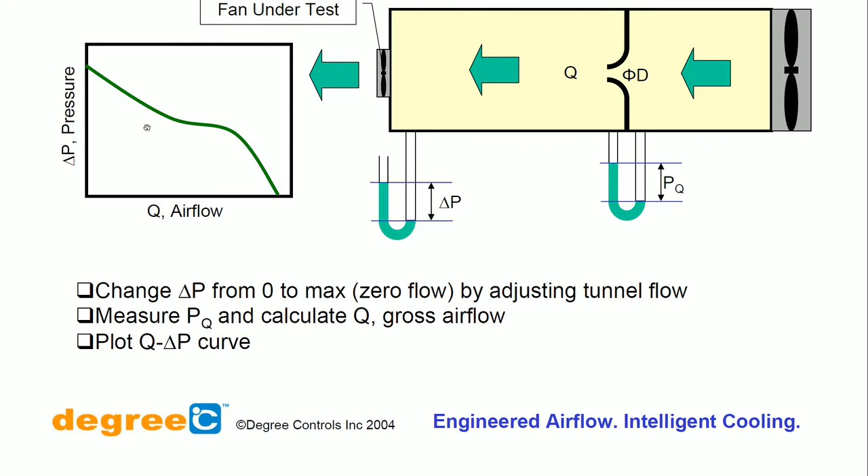Again, as is the norm, this is taken from what I call Engineered Airflow Intelligent Cooling by Degree Controls from 2004. It has been presented very well, and in general it covers what I feel is important for a designer to understand.

So obviously every person has a beautiful brand new machine, but not many people make their own clothes, because designers and merchants are out there to change the designs.

So coming back to my slide again, these people have suggested one very simple way: you must have an authentic pressure versus flow characteristic of a fan. It's not easy to determine that for one particular piece which you have been using. The simplest way of doing it is to make your own setup. It is not an impossible thing.

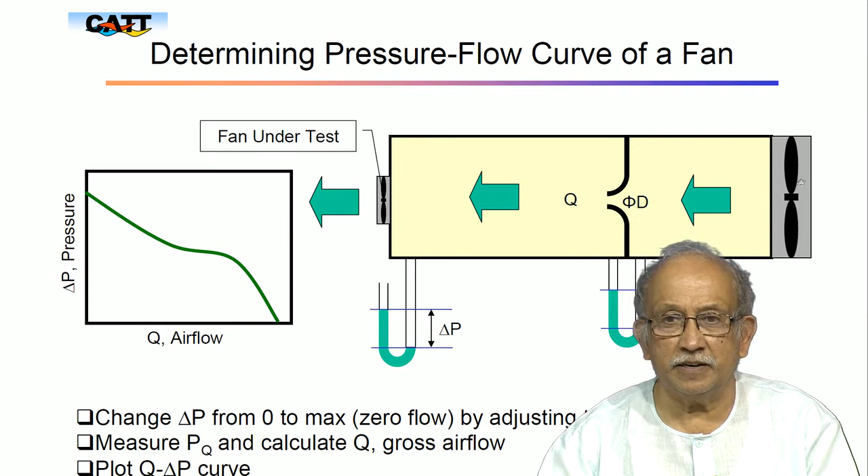The issue here is we need to somehow plot this curve: pressure and change in pressure versus airflow. This is where we end up with real life conditions.

What is the voltage with which you are operating, and related to that is the frequency also. Imagine most small motors are very much dependent on both the voltage with which you operate and also probably the frequency. While for a larger motor it is very easy for us, for a smaller motor, especially if it is AC, you need close control. If it is DC...

To some extent, somebody has done this experiment for you, and being a DC motor, life is relatively easy, because with a DC motor you have only one simple parameter - increase the voltage, and it works well without any problem.

In the case of AC, you need to characterize this, and this is where things get complicated. A small change sometimes makes the curve significantly different, and it may or may not follow like this. For all we know, sometimes it may cross and come over here. A small change, similarly a slightly lower voltage, may lead to other effects, and there is also self-heating.

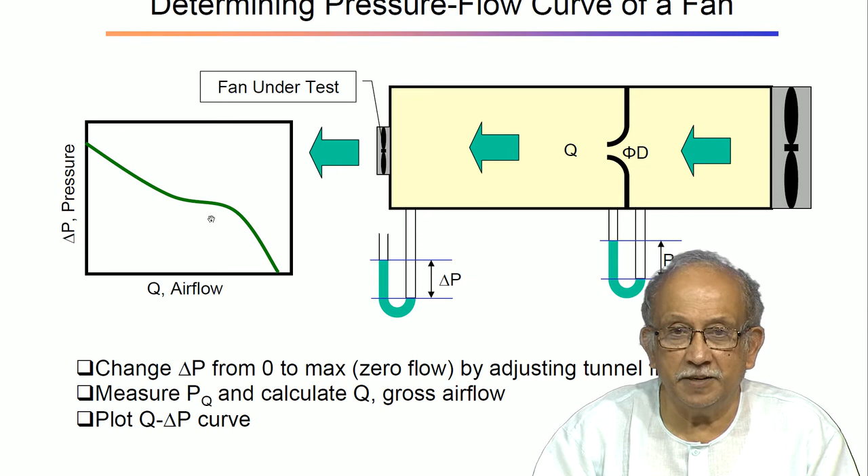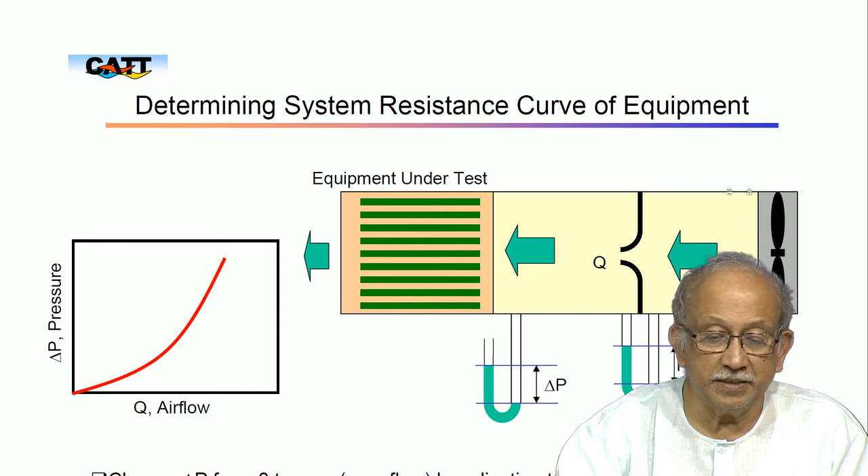When you run a fan, two things happen: one to the motor itself, and one to the air all around. So if you have an authentic curve using this plenum chamber setup, it is very much possible for you to plot these things.

Similarly, the much more important or difficult thing for you to plot is the equipment system resistance, which, even if you have measured it, is a little dicey, because very rarely can the final equipment be directly used here. You still have a scaled down model, and whenever you have a scaled down model, these principles of dynamic similarity apply. So only to a certain extent can you make a scaled down version or even a full scale mock-up.

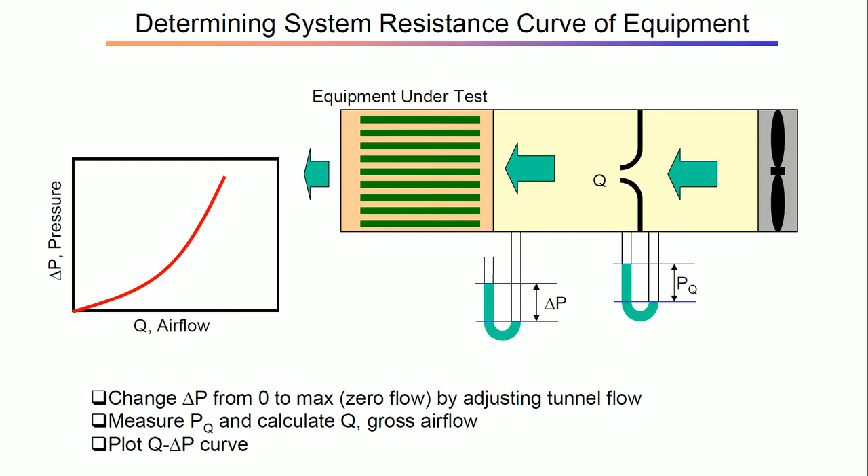So if you do the same thing - find out the change in pressure from 0 to maximum by adjusting the tunnel flow, measure P Q, calculate Q, and plot Q versus delta P curve - it looks easy. After that you superimpose one over the other and expect everything to work exactly, but no, miraculously, everything does not just work. There are not many miracles that happen - you have to make your own miracles.

So we see here, obviously, this is a beautiful, nice and properly laid out piece of equipment.

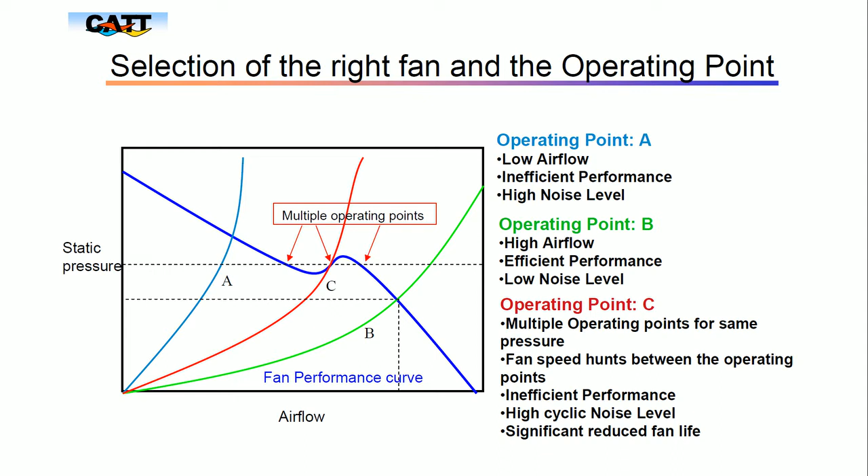In a properly laid out equipment, you have ensured that the static pressure for a given airflow is very low. Improperly laid out equipment ends up with problems, and this may be due to bad luck because Murphy is at work. Murphy is not at work only when you lose a nut or when you are otherwise careful. Murphy ensures that we end up with these funny things.

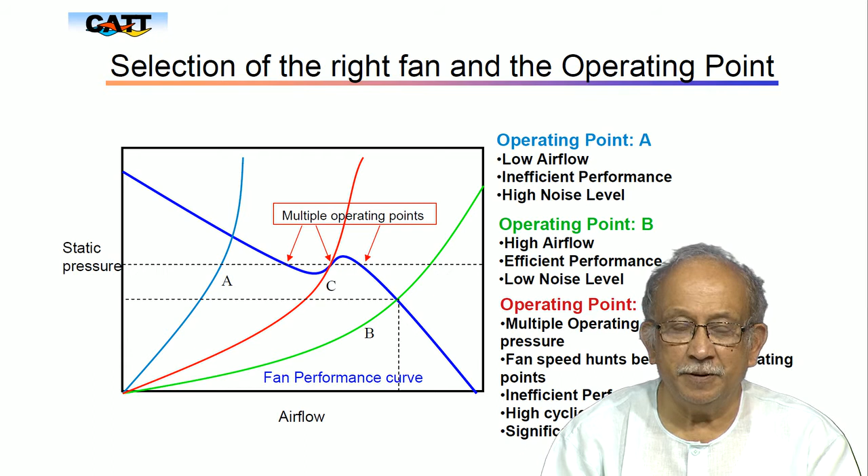And anything you do to improve any other heat transfer seems to interfere with these things. If you put more fins, what was perfectly fine has now moved to that side. And then if you try to add baffles to ensure that your air is properly channeled over your hot surfaces, you may even end up in a situation where you do not know where you stand.

Then what did they do? They had to mill the heat sink in a particular way so that the air can go away properly. Now, all these things, there is no simple way of modeling and calculating.

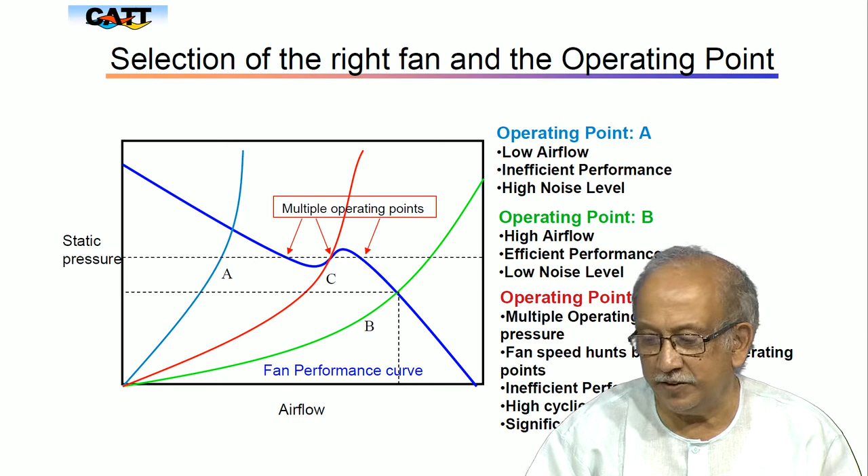We have this issue of smart design. It is not about a new type of smart design, but what we are talking about is being smart in design and eventually trying to put proper sensors and all.

Can we simply increase airflow as power increases? It is obvious, it is sort of a rhetorical question saying yes or no, and cost we also know, no, sadly cost is very much around.

And next, though he says a quick summary, it is not as quick a summary as it sounds. You have seen here.

Type of fan: tube axial, vane axial, blower; operating point on the fan curve; size of fan diameter; speed of rotation; density of the gas or air. Most of the time luckily we use normal ambient air, but once in a while you may be forced to dry the air, or you may be using a chiller in front of it, which marginally changes things.

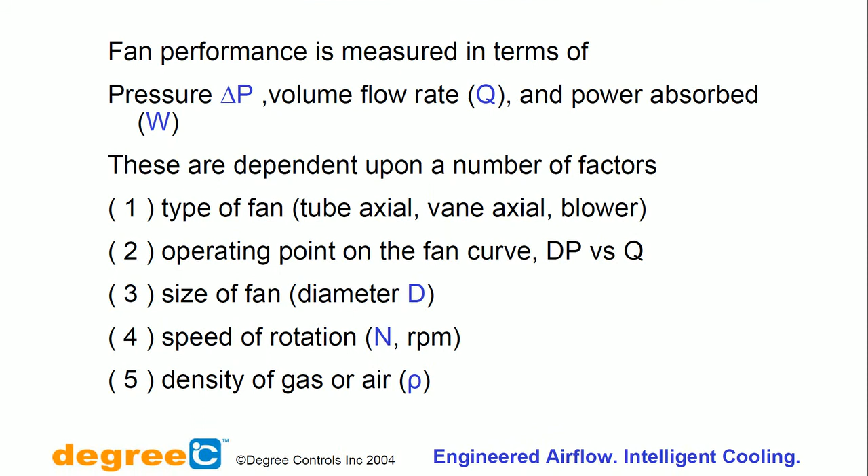So we have the speed of rotation - faster obviously gives better flow rate - and then right now we have the issue of efficiency of the whole system. As we are working for more and more of the change in going green, we need to consider efficiency. It is not just about peak power or peak torque or peak flow or anything like this.

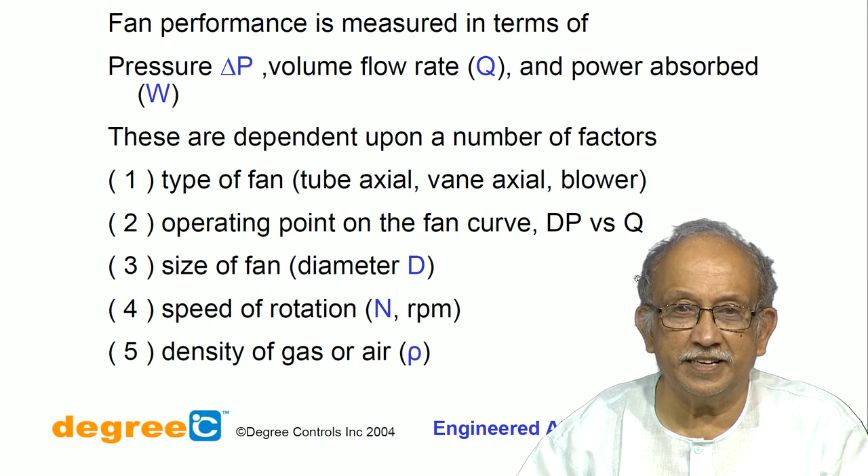So they have given so many things here. I think those are all. Considering a point of operation on a fan curve, it is possible to derive some simple scaling laws between change in pressure, the total wattage, then the speed and the diameter of the fan, and so on.

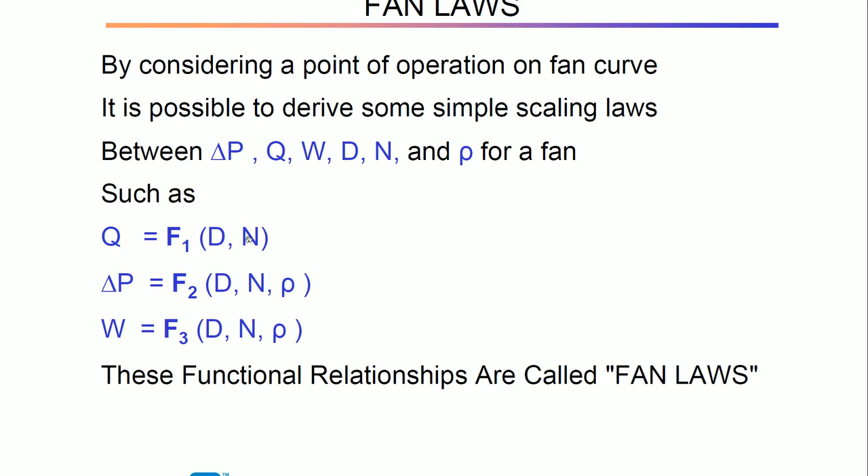And rho for a fan, you can read here, is a function of this and this, saying diameter is large and the speed is more. Delta P is again a function of these things, and he has shown that...

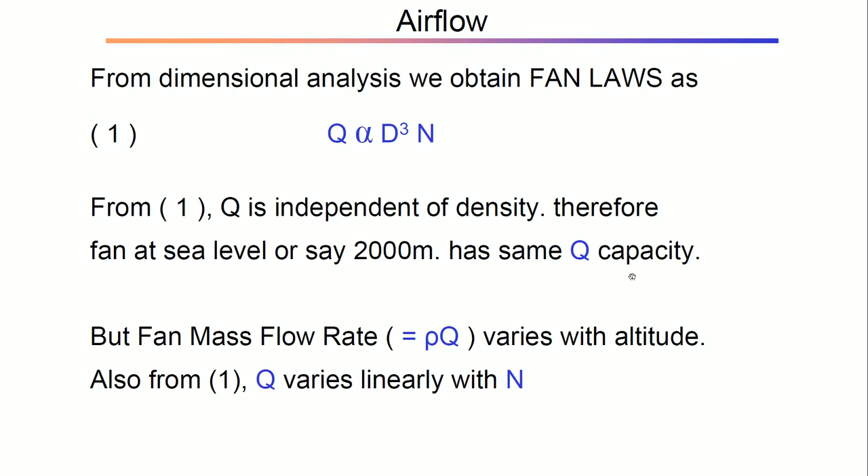Q is independent of density. Therefore, a fan at sea level and at 2000 meters has the same Q capacity. Fan mass flow rate varies with altitude. Q varies linearly with N.

So there is something about the differential pressure, then there is a pumping power required, and then the total - if you ignore electrical efficiencies, suddenly something else has come into picture. Fan motor itself has a resistance, which slightly depends once again on the speed of operation, back pressure, and so on.

So we have this pressure and power characteristics, and some nuisance which is getting real. Actually, if you are stuck in a room where a lot of this equipment operates, we end up with sound, too much of sound.

So, it is real - you have no way of getting over it. Just sticking a fan in the airflow path, compared to what I've told you, and making it face a load - if there's a hot component, you make it face that - does not seem to cure all problems. One problem it solves: it makes the peak temperature less.

Actually, the fan has no that much direct control on peak junction temperature, as much as cooling the fins of the heat sink. Once the fins of the heat sinks are cooled, a lot depends on fin efficiency. At very high velocities, if you take a standard normal extrusion, fin effectiveness comes down. Beyond a certain point, that's where Schoenhauser mentioned, do not exceed 6 meters per second - beyond that it does not seem to make any difference, except it's already neatly packaged. And noise is dependent on speed.

Okay, next is engineering implications, or the 4 fan laws for sound, then the total amount of discharge, total amount of power dissipation, and then total amount of static pressure.

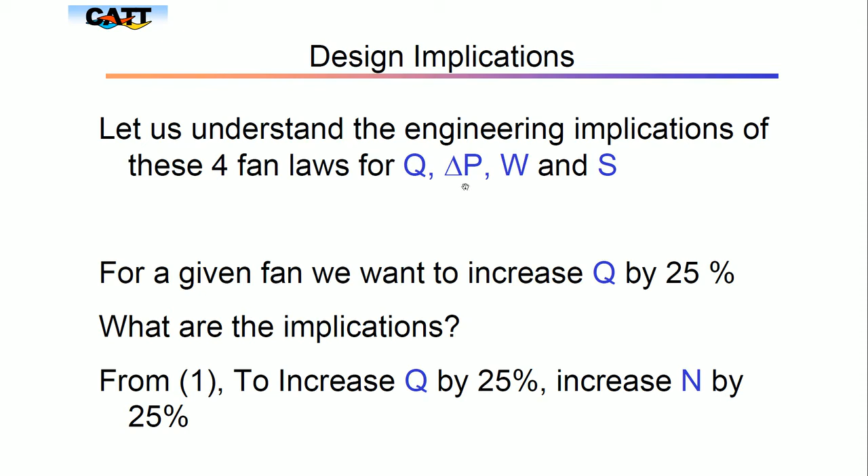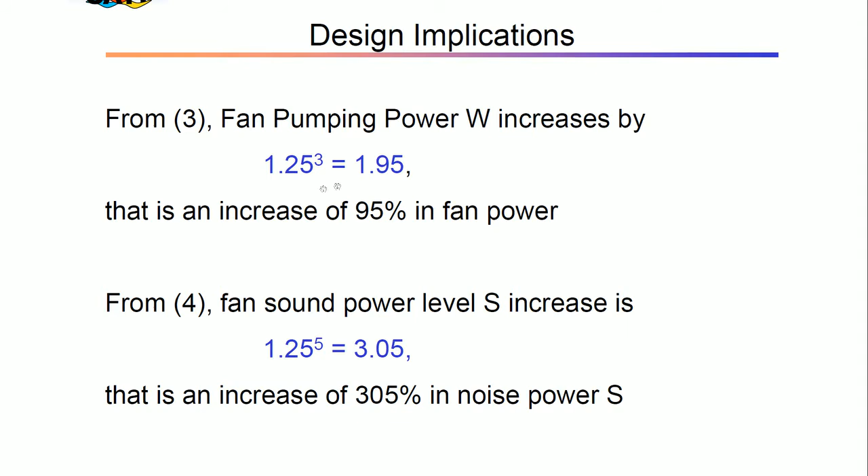We want to increase the discharge by 25%. To increase it, we increase N by 25%. You see here, pumping power seems to go up by 3 times. Fan pumping power now suddenly has become doubled. What was 1.25 has become such a horrible thing - 95%. Sound power level increases 3 times. So now comes the trade off - what do you do?

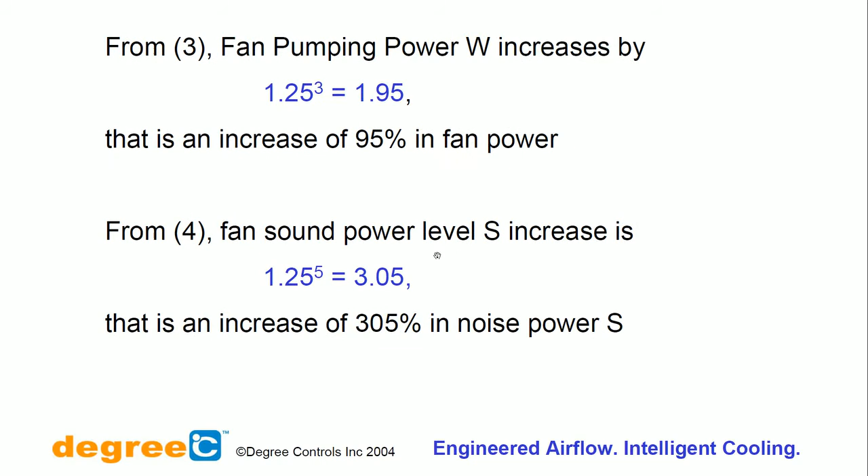So, from the sound law, it can be expressed in decibel form as change in sound power level. So a huge difference is there, though he says 5 dB difference in sound level is noticeable. Acoustics talk about a 3 dB thing - 3 dB is sufficient for most people to feel uncomfortable. From this, a perceptible difference is 3 dB, especially in silence.

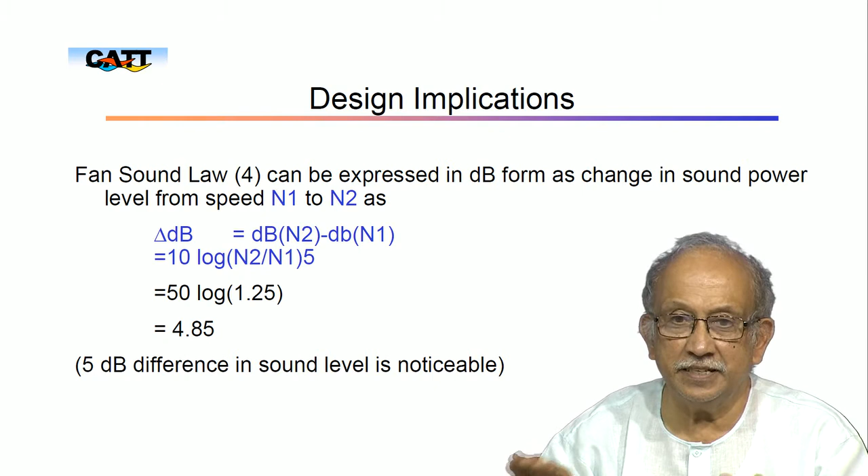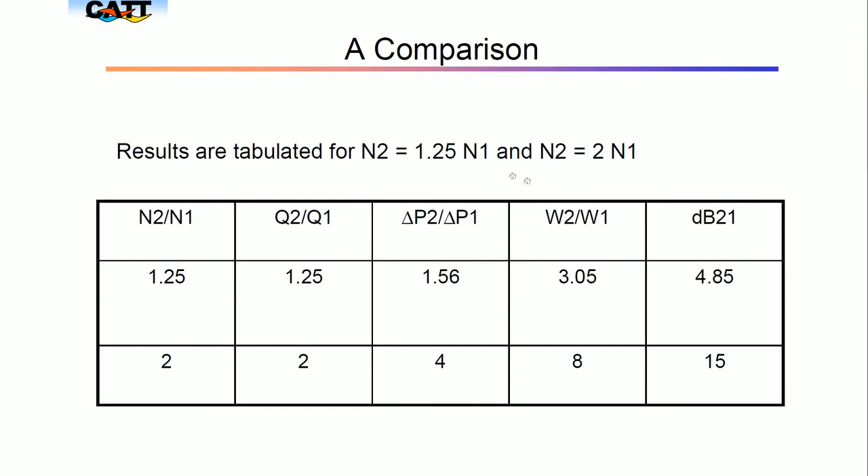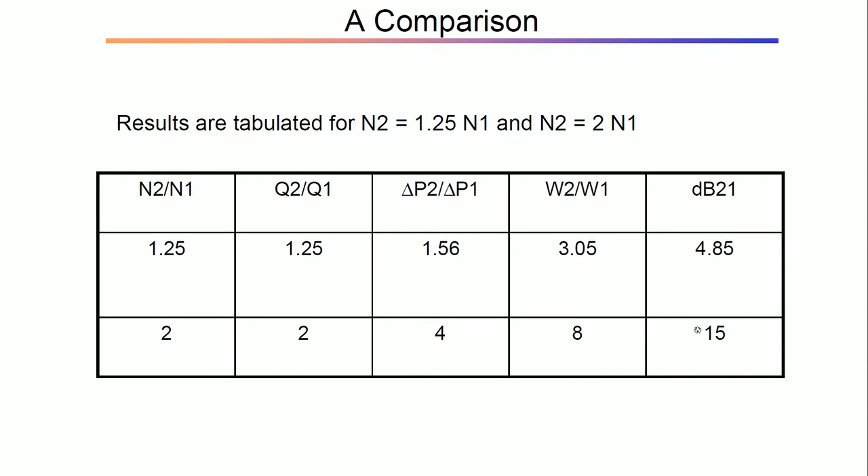So, this is probably the sum up of all the things related to fans. Doubling the speed increases heat transfer coefficient by only 62%. To remove more heat, airflow should be doubled. Doubling airflow causes delta P to increase by a factor of 4. Power required to double airflow is 8 times. Sound level increases by 15 dB - that's a lot.

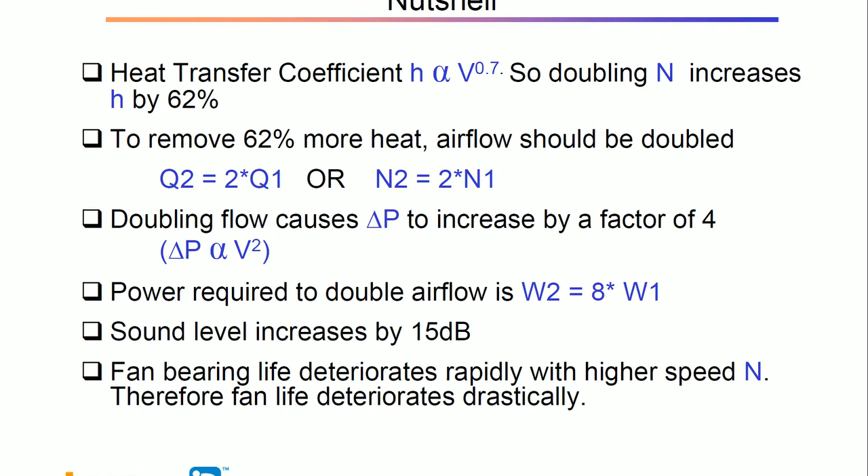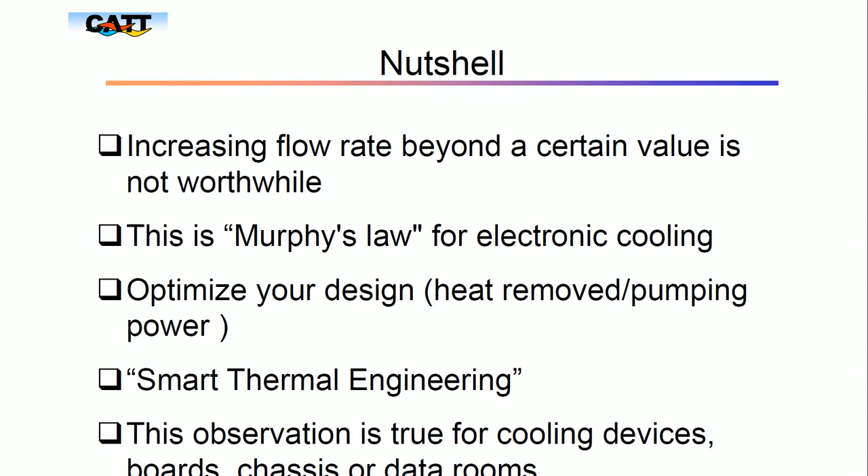And something which we forget - the fan itself deteriorates drastically. So, it's not just enough to add a fan; we have a problem, you can just marginally increase the speed also, it's not constant. This is where people with that experience have said - increasing flow rate beyond a certain value is not worthwhile.

Murphy's law for electronic cooling: optimize your design for heat removed versus pumping power - smart thermal engineering is true for devices, boards, chassis, or data rooms. For cooling devices, you would have noticed long ago - the chips themselves, we have a little problem with the chips.

Next comes - how do you cool things? Is it just about simply increasing conduction, or do we now talk about phase change, or do you talk about Peltier mechanisms?

Things like heat pipes seem to go in and out of fashion - they come into fashion, they go out of fashion, they come back in. As of now, you can't beat simple conductive heat transfer from the chip and a little bit of better geometry on the chip, including mounting it upside down.

Next time a cell tower is being opened and checked, I suggest having a look. If possible, I will try to have a look at it too.

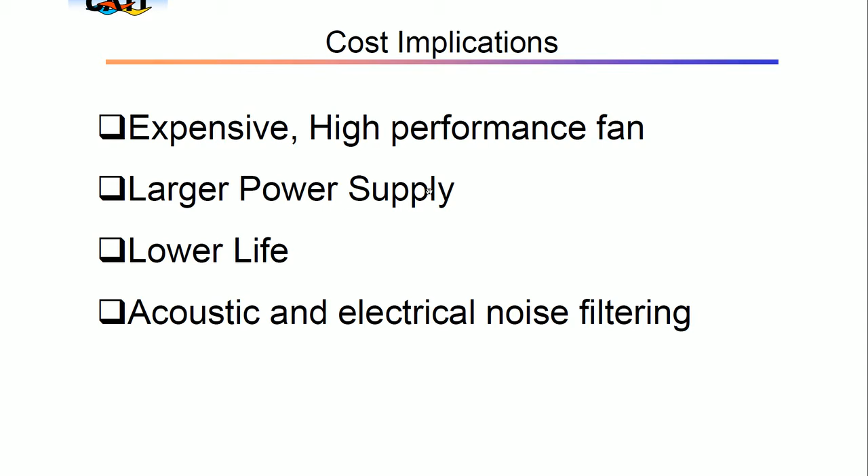The earlier approach is just to make a better fan, but are we ready for a better fan? The military can afford it, and others can afford it too, but the moment you do that, we end up with larger power supplies, and overall we put up with lower life, and we have this big nuisance of electrical and acoustic noise filtering. It is real.

It is just real. Beyond that, at this point I can't comment on that.

I will just show you, this to me is a wonder. I have this small beautiful hearing aid, it costs a lot of money. Sir, can you focus the camera on this, zoom in if possible. You have seen this, this small device has everything I can talk about.

And you see this, I am sure all of you have this, this nice fashionable watch. This is the tracker, it tracks my health and my whereabouts. Other people have a stake in me, other stakeholders in my good health besides the insurance company, so obviously a lot of people need to know about it.

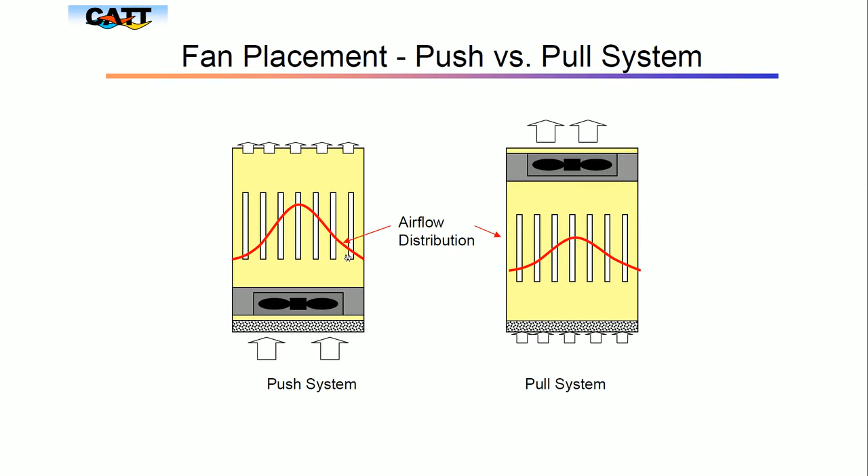So it is possible for us to decide which way to mount these things, and in this case it looks almost like a laminar flow in a pipe, which is not strictly true, they are just showing it that way. So you can decide where to put what in these systems.

You have seen this here, very important, I had mentioned it to you in passing: pressurized system, clean air, low fan operating temperatures. In the push design, the main thing is you direct air directly, and the fan itself sees ambient air which may be cooler than the exhaust air, and very importantly the whole system is under positive pressure.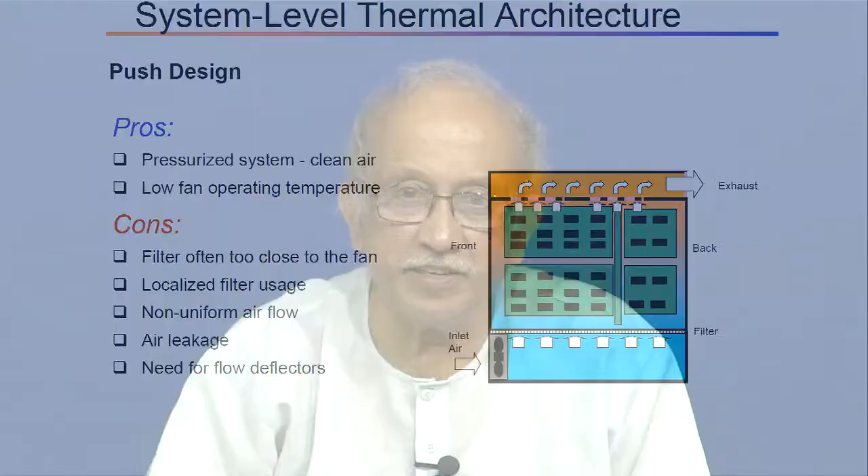This is the same thing that happens in most clean rooms, they adopt that system, the whole chamber is positive. So to the extent that when you open the door, or even through small gaps everywhere, air blows out of the gaps, and any air pressurizing inside is filtered neatly and kept pressurized, so unwanted dust and outside contaminants do not get tracked into the space. I hope you appreciate the point.

Whenever you push air in, with the inlet air pressure coming here, the whole thing is under positive pressure. The color again depicts cold versus hot visualization, and you see here everything is cool. You have a filter which gives you slightly better control over it, but the con is that airflow is not uniform.

If you have so many racks, so many PCBs, and you have a fan here and a fan here, we do not know where the air is flowing. You have really no strict control over it.

Localized filter: if you have a square filter and put a small fan in it, the air does not get enough gap for development of the flow. So you will get a nice patch of flow, but the remaining area will still not be useful, and then you have an air leakage issue here.

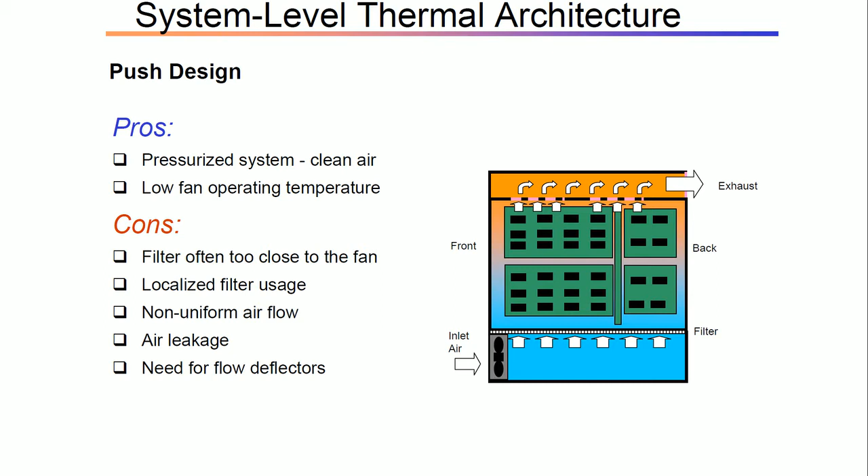While it looks nice, the smallest gap - let's say you have a connector, a switch, or access somewhere - any small leakage will allow the air to escape. So we have a problem there, and he calls it a flow deflector. You end up trying to use aerodynamics, CFD, and those things to push air properly. If you don't use that analytics, you will end up with trial and error, fit and see, blow and see what happens. So while it is complicated, professionals are there who do it all the time.

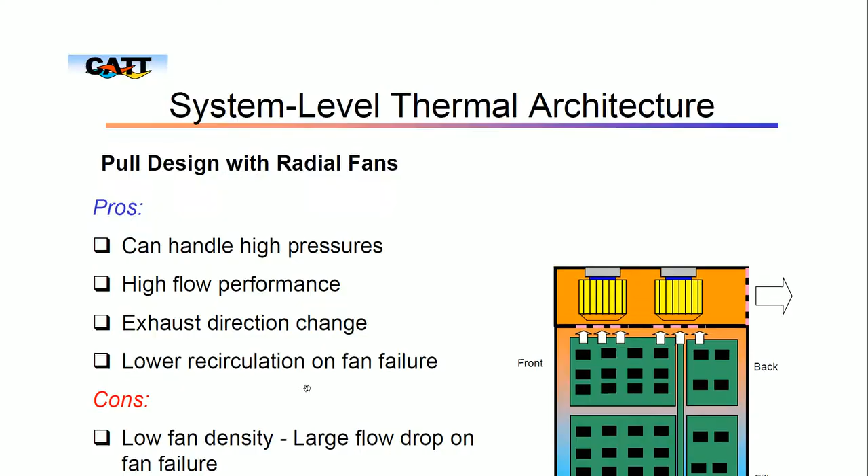Now we come to an equally interesting thing: can we have radial fans with a pull configuration? If you remember, I showed you the two circular fans in the center - there's an inlet, and exhaust is all around. It's a simple radial fan which goes in all directions, sucking in air, and then throws it out in all directions.

Now, if those fans have an involute housing, it becomes like a regular blower - a little like the blowers you may see at home in your kitchen hood. If you have a hob and a hood above it, there are very simple ones with only one or two fans stuck on. There are very complicated ones which have these extractors with special involute casing blowers attached. The advantage inherently of these is it can handle higher pressure for given parameters, but they also take a lot more power, have high flow, and allow exhaust direction change.

So it is possible for us to play around with which way it goes. That's what I was telling you about lower recirculation on fan failure. In the unlikely case of fan failure - meaning not a dead fan, it will start running slow - inside, the chances of things getting recirculated are poor.

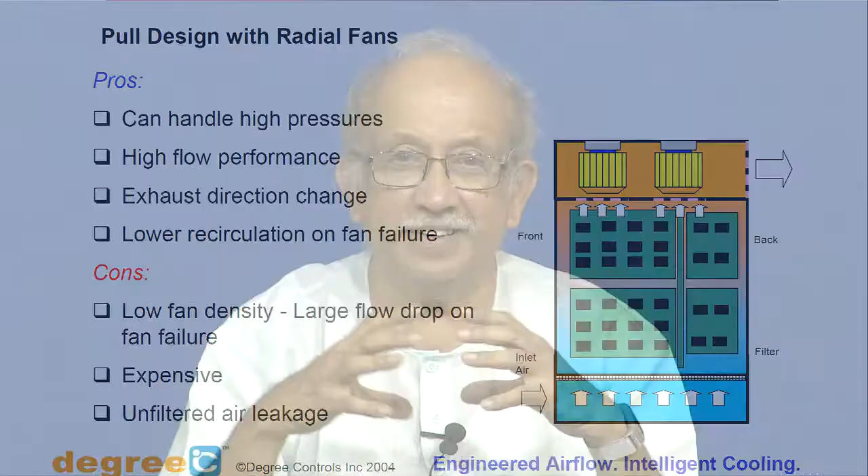Low fan density, large flow drop on fan failure means expensive, unfiltered air leakage. You see, the whole plenum - that whole cabinet is like a plenum chamber - is at a lower air pressure than outside. So the first thing that happens is it acts like a vacuum.

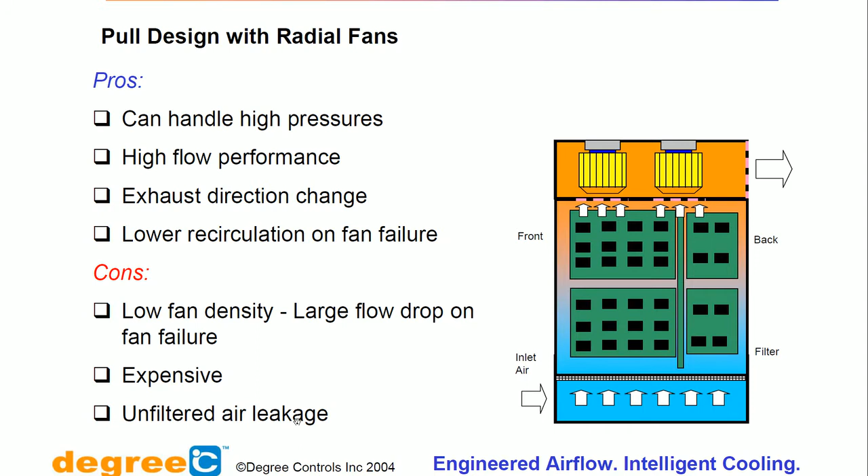Anywhere there is a small gap - let's say you have a potentiometer for adjusting something which invariably comes with a cap that has to be closed, or you have a connector which already has a cap. Not all connectors are fully IP67 sealed and all that. So anywhere these gaps exist, air keeps going inside. And power is reality - you have power cables, and various places where cables have to be inserted, not quite a full bus bar. All these places will suck air. So the problem isn't just about air leakage, it's about unfiltered air getting inside.

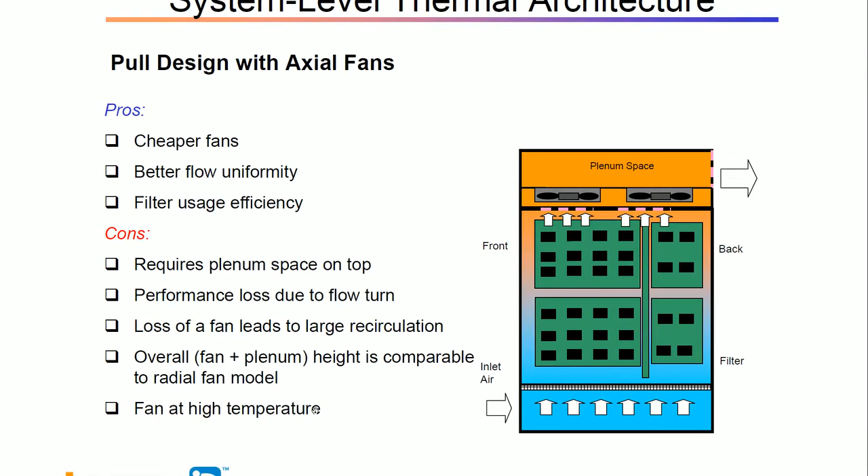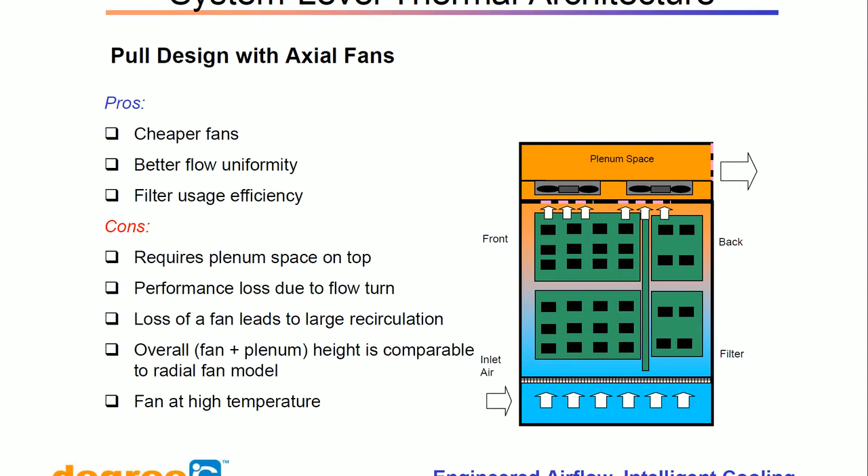So while that was shown with radial fans, now with axial fans it seems to be very easy to manage. All you have to do is take the fan which was originally at the bottom, remove it, and put it on top instead, with a space here, and you can buy these fans off the shelf.

I expect the ones we get now are the 100, 120, 110 fans - about the size of a CD. So they don't cost too much. In Indian rupees, a good metal frame fan probably costs about 500 to 600 rupees, and works directly on AC - so maybe 10 US dollars.

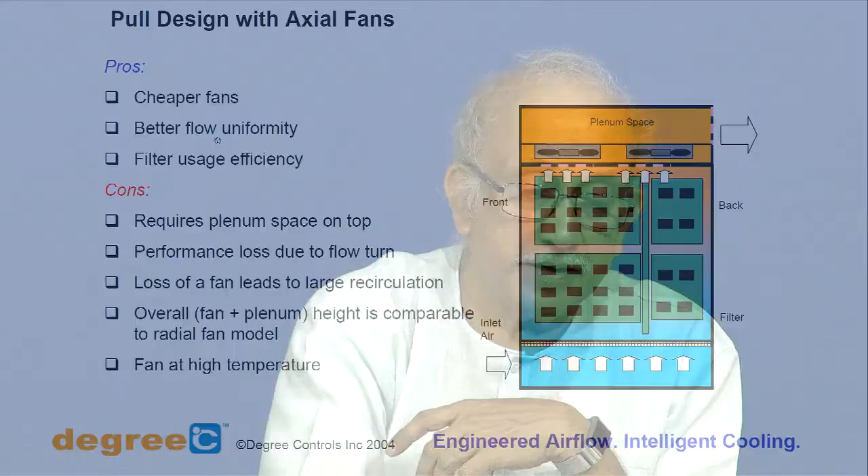So you can stick as many as you like all around. This gives better flow uniformity, the flow can be controlled, and most important is filter usage efficiency - because while here the pressure drop can happen, as it comes down, all parts of the filter can be directly used, which is good, isn't it?

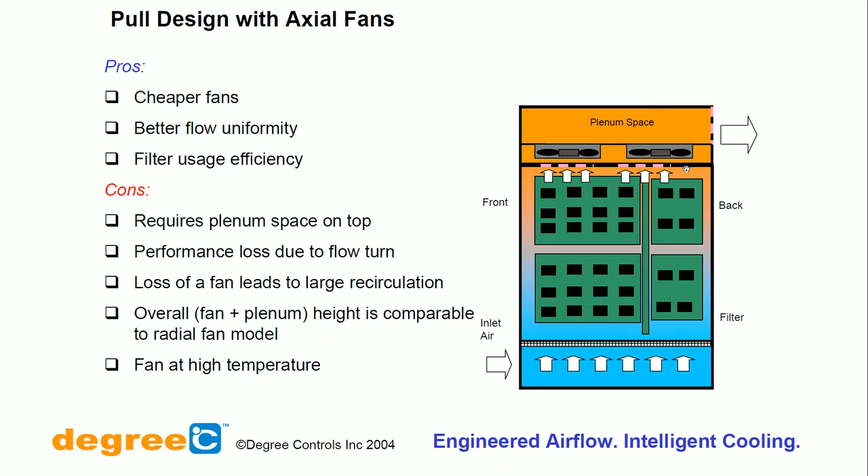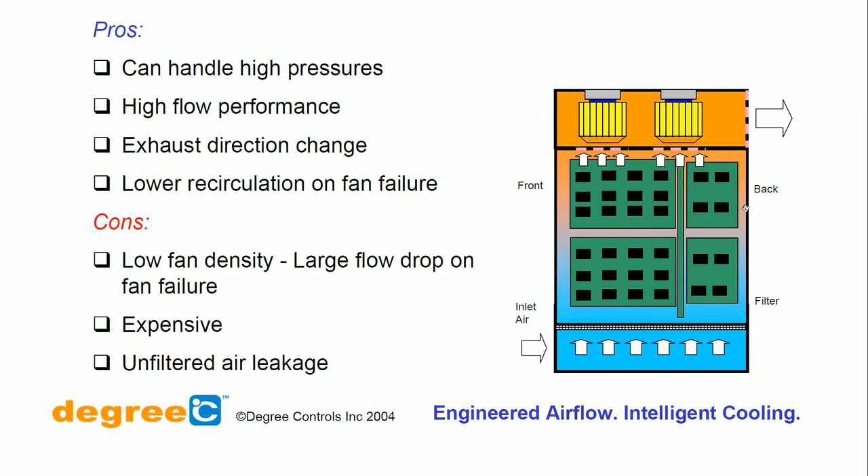Now, the problem here is there's a space required on top. In the previous picture, not much space was required. If you remember - here it's only limited by the total gap of the fan that's available. Only for convenience, and not to scale, he has shown all of them now about the same size.

Other than the fan itself, no extra place is required for us, and whenever there is an attempt for the flow to turn, you have a small problem here. This area is already at a slightly positive pressure compared to that area. So however you arrange this fan and this space, there is always a compromise.

Loss due to flow turn, loss of a fan, leads to large recirculation. I am not very clear at this point, but what I expect is, in case one of these fans fails, the air does not behave the way we want it to. Fan plus plenum height is comparable to the radial fan model, which is what he has shown. Fan sees the high temperatures, you see here this red, already the hot temperatures are all seen by the fan.

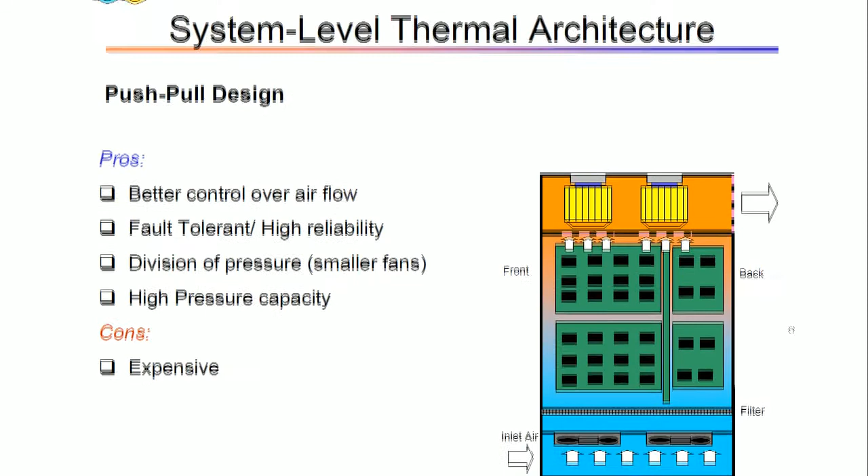So the next slide talks about, can we have a compromise? Can we have a push-pull design, saying you have something pushing here and something there? Like all other design considerations, it is still a hodgepodge and a compromise.

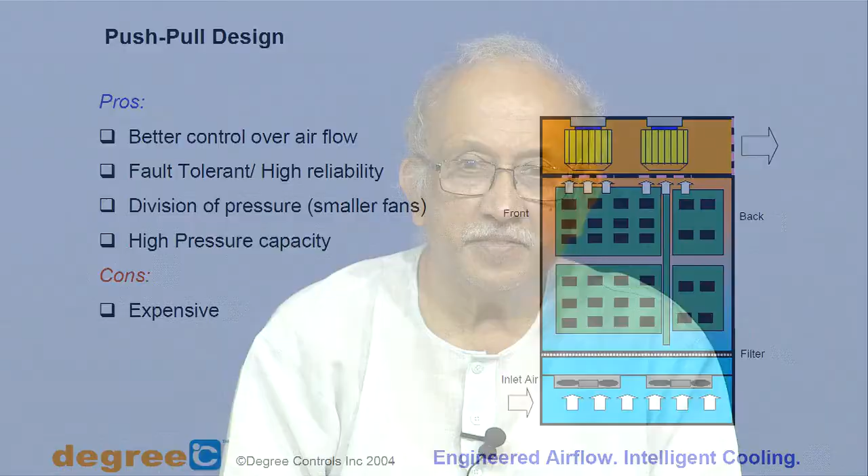So airflow you have some control over, slightly higher reliability, though I would like to contest that, because the more devices you have, the chance of failure is a little higher. But in the case of a fault, there are still parallel things operating, which happens with nature.

You must have heard of something called collateral circulation, which happens when people have a heart problem. Suddenly they discover they have been living with it for, let us say, 50 years. They say you had this at a young age, and nature has compensated and given you alternate circulation, hence you never noticed it. Now when you come, you have this.

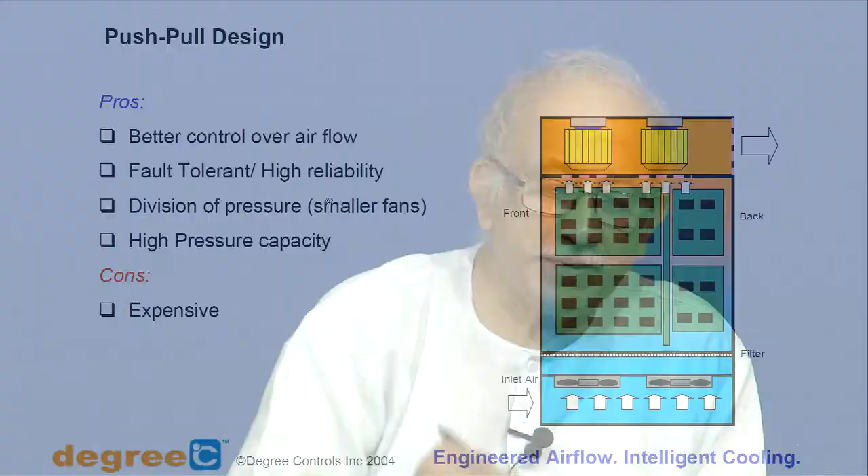So coming back here, the pressures between this and this can be improved. Fault tolerance is about that, and then high pressure capacity, because we have full control on it. On one side you are blowing and on one side you are exhausting, but the main thing is it is extremely expensive, and contrary to what we think, it is not as easy to control as we think.

Where do you put the sensors, where do you put the vane switches, and how do you take care of temperatures, and which one do you switch on and which one do you switch off, is not known that well.

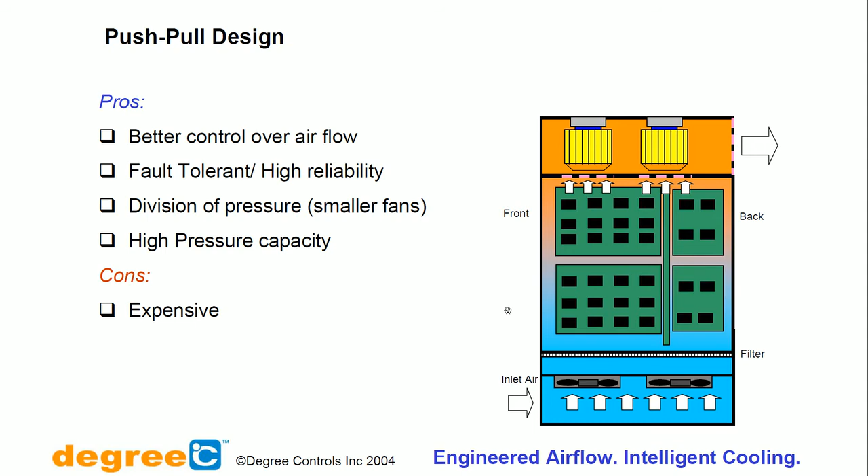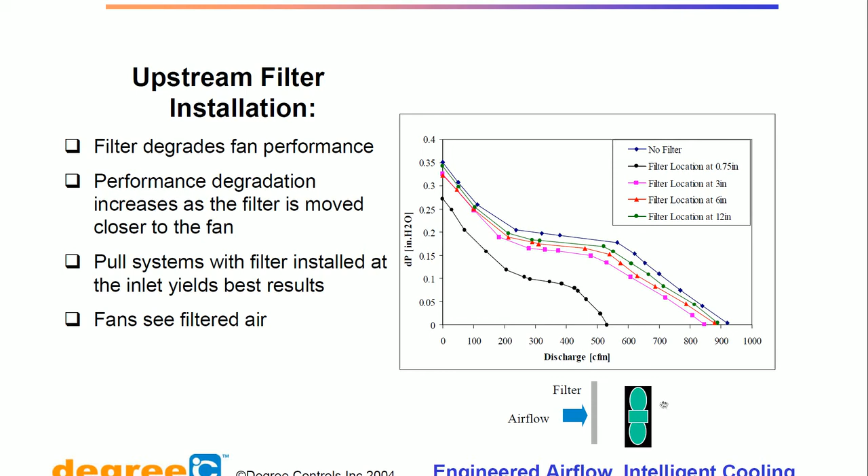If you put a little more gap and move it back here, it is better. Pull systems with filter installed at the inlet yield the best results. Fans see only filtered air, which is a beauty compared to the other one. Just like you have this thermal heat issue, if you were to keep the filter here, the fan is relatively cooler. So when the fan is rotating, all the dust gets settled here, so maintenance is a little less.

So we have that the same thing is maintained here. Filter degrades fan performance, location does not affect fan performance, cannot be used for pull system, fan sees unfiltered air. So you have the advantage and disadvantage. This you probably would have noticed, in case you have an exhaust fan in the kitchen, it always gets coated with grease. I think you have taken all possible precautions, but grease is real. The same fan, when used in your restrooms and toilets, you do not have the grease problem as much as you have other problems. So the specifications are significantly different.

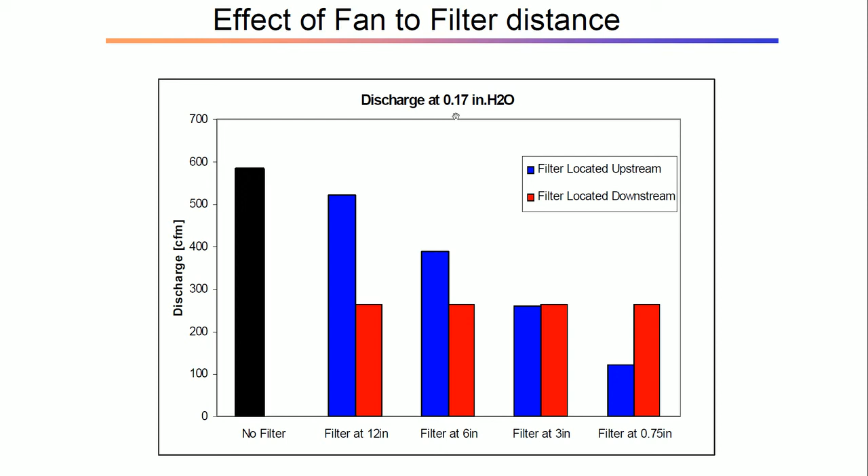So these have all been plotted, showing filter located downstream, upstream, the gap, and no filter, and how discharge changes with so many inches. I am sorry, he calls it 0.17, I am not familiar with it. I expect it is about 5 millimeters of water.

Now we come to the very first, fast evolving things. So we have nice computers.

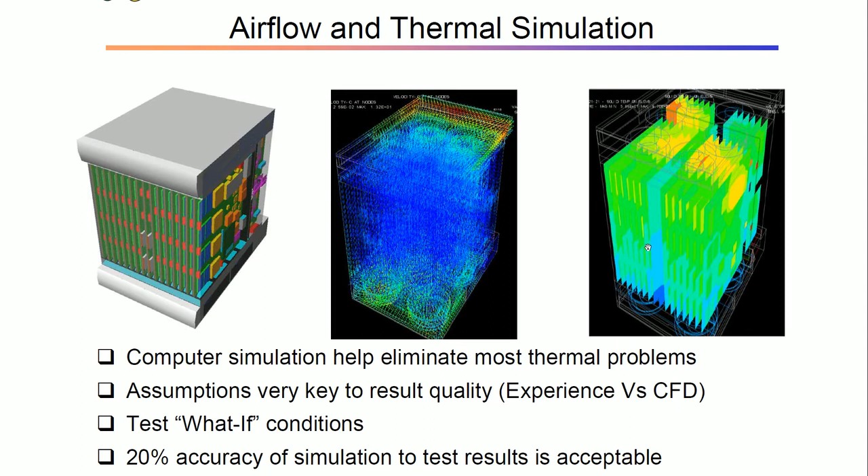He has made, I feel, an off the cuff statement saying computer simulation helps eliminate most thermal problems. I do not agree with it. At least it knows where the problem is, and then the next stage of optimization of positioning does solve the problem. So airflow and thermal assumptions are very key to result quality. So, garbage in, garbage out. Unless you know the actual heat transfer coefficients, actual performance, everything, and the main thing is this: what-if conditions. If I put more spacing, how does it happen, what to do, and all that. So I think they have shown something which is simulated.

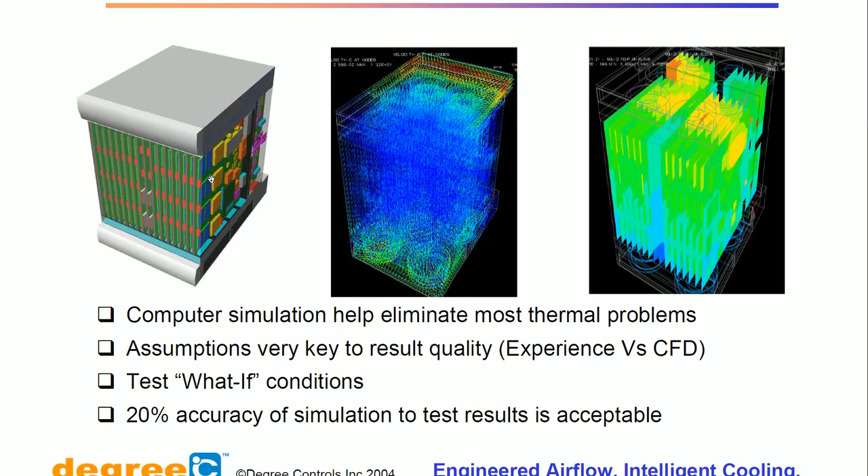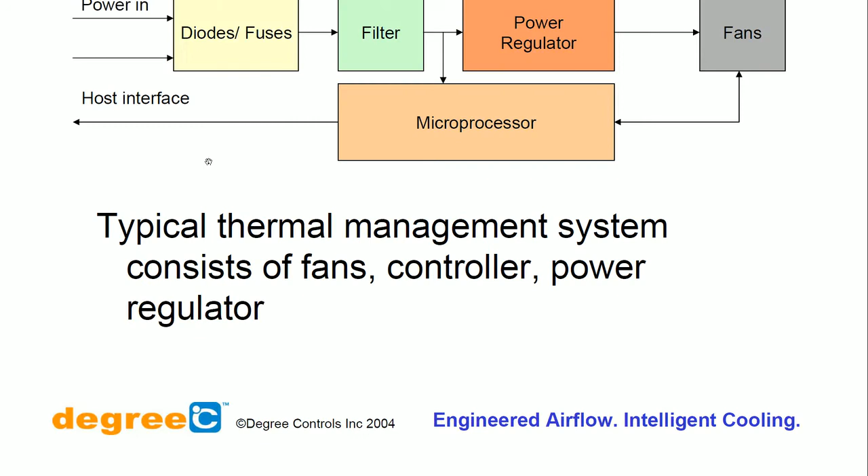Why I feel emboldened to show this is, we have done a similar thing in the case of one of the early telephone exchange racks in India. So maybe it is a lot of control of a cooling management system. You have diodes and fuses, and then you have filters, a regulator, a microprocessor.

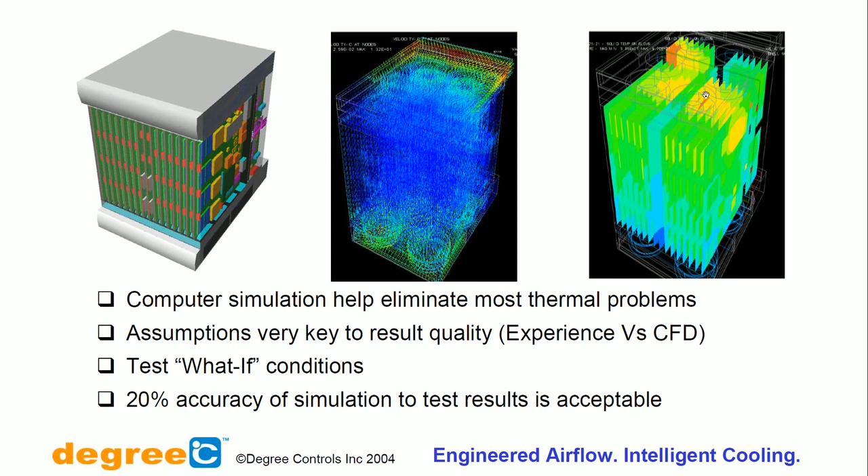Coming back, you see here we have a computer simulation which, I will repeat again, does not really solve problems, but it can test what-if conditions, saying if we do this, what will happen. So in this case you see here they have put 1, 2, 3 some devices which will form the configuration, and we come here slowly.

Various types of things, saying the thermal management system consists of a power regulator and the actual fans, then you have filters, and these are all some backup things, saying in case of something, what will happen. Especially to prevent that, they have given a diode logic here. So you can in fact have two dual power supplies.

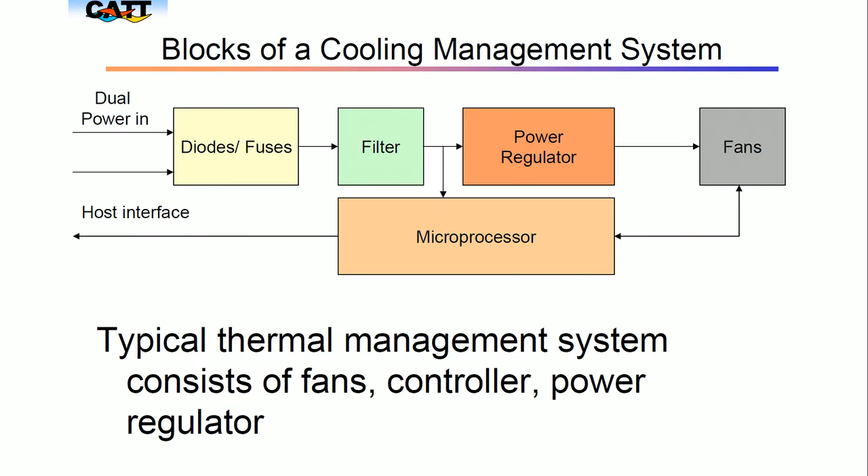So one of them will come, then this microprocessor is attached to the host interface, where it will take its input from various sensors which are mounted. So the next picture talks about...

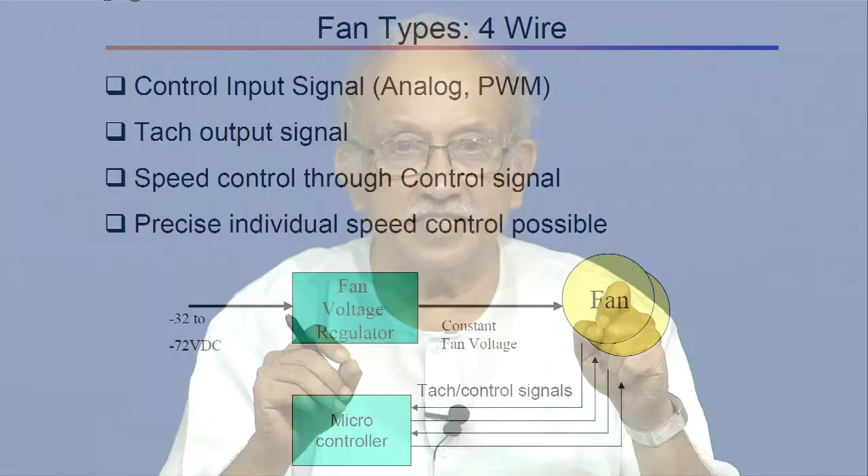3 wire, the succeeding pictures explain: control input signal, analog and pulse width, tachometer output, speed control through control signal, precise individual speed control is possible. So what is done here is, each fan has control signals, and individual fan voltages are measured here. Instead of the fan having only 2 terminals, each fan now is capable of having 4 wires. It is used normally in electronics whenever you want to take a measurement of even a resistor, to prevent the leads from affecting that, you have leads directly at that point. So instead of taking something here, you need to take for everything, you end up with 2 leads. So if you have a full 4 wire system like this, you have much better control.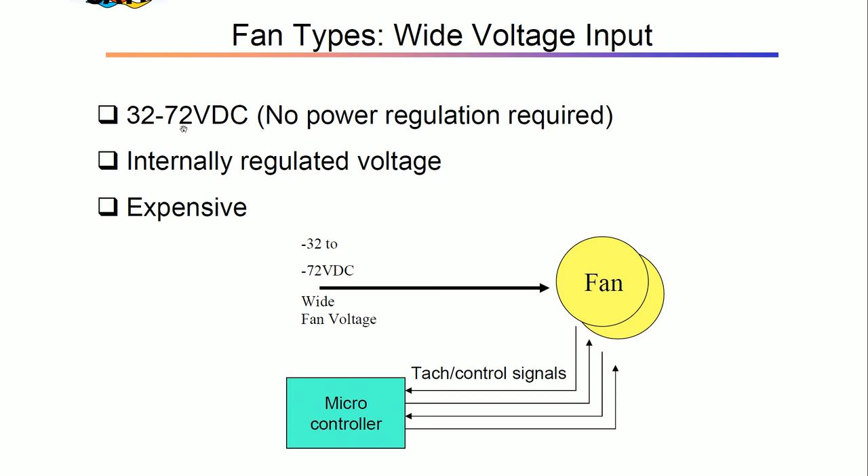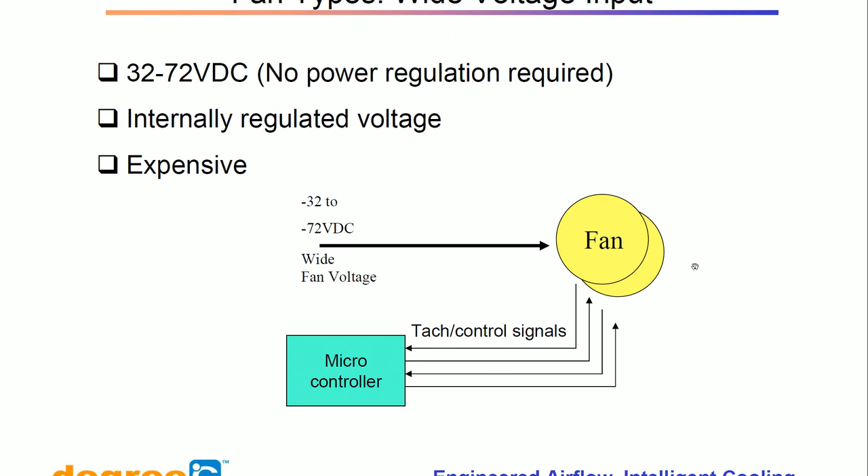No power regulation is required if voltages are available here, internally regulated. Only problem is it's expensive, somebody has to work on it. I feel it is more taken as a challenge by this company.

Yes, the input range can vary, fault tolerant, and something very important is hot plug-in, meaning when the equipment is running you should be able to add or remove fans. It is a little tough. If you have some redundancy, at least things can hold on for some more time.

As you remove a fan, maybe you have access everywhere and can divert it, so you should be able to quickly have another fan ready to run, remove the old one, push it in, and start up. The whole thing should be operated very quickly. I expect it should not take more than around 5 to 10 minutes, typically that is the time required for the whole system to malfunction.

We have this thing about I am not very clear what this switching is. It probably means cutting in and cutting off of the fans, and then we also have this stuff about inrush current, so then commutation noise suppression.

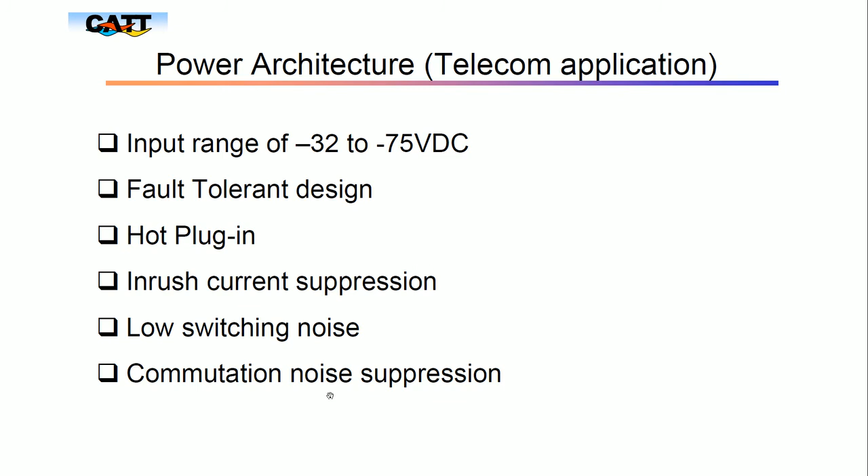In case you have DC fans which are commutated through old brushes and all, or even with electronically commutated fans, obviously we have a little issue about the fan motors themselves now altering the various characteristics of the rack.

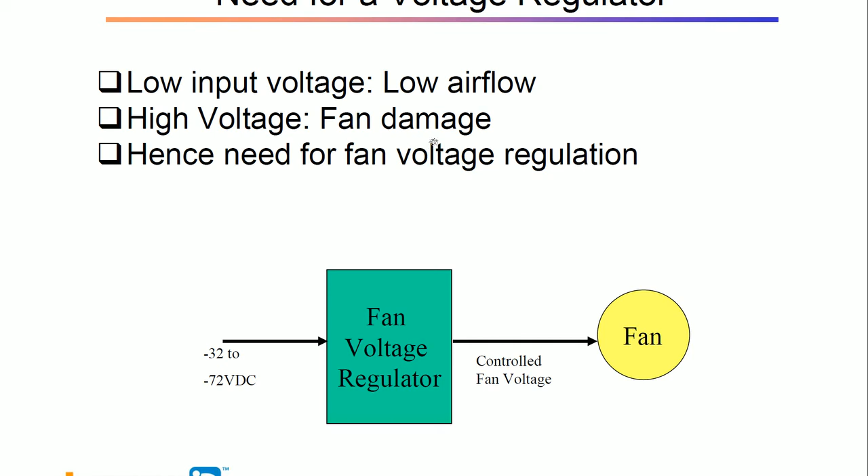They have all this stuff about a fan voltage regulator typically for this, and contrary to our popular intuitive reasoning, motors never fail due to low voltage. Not many people appreciate it. They say the voltage was there and it failed, but in fact motors are capable of operating up to a certain lower voltage. Below that they fail, but higher voltage is catastrophic.

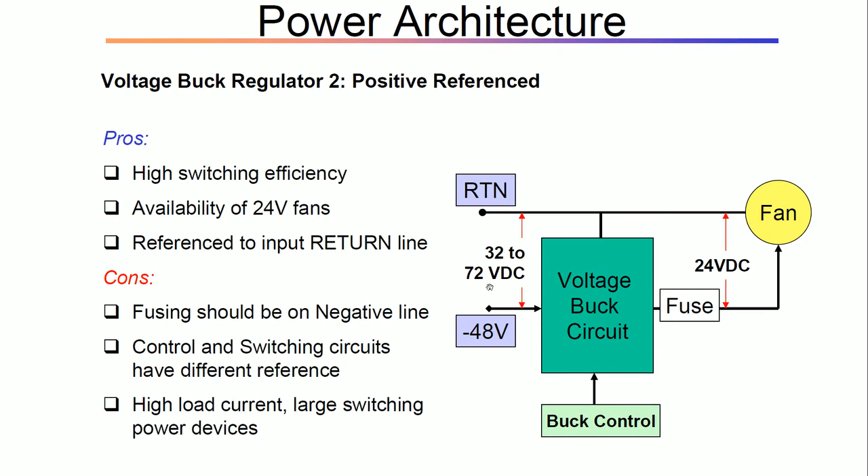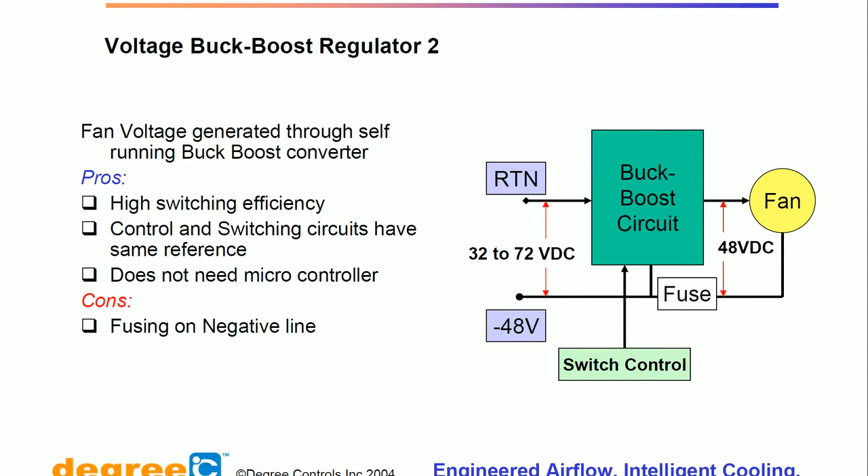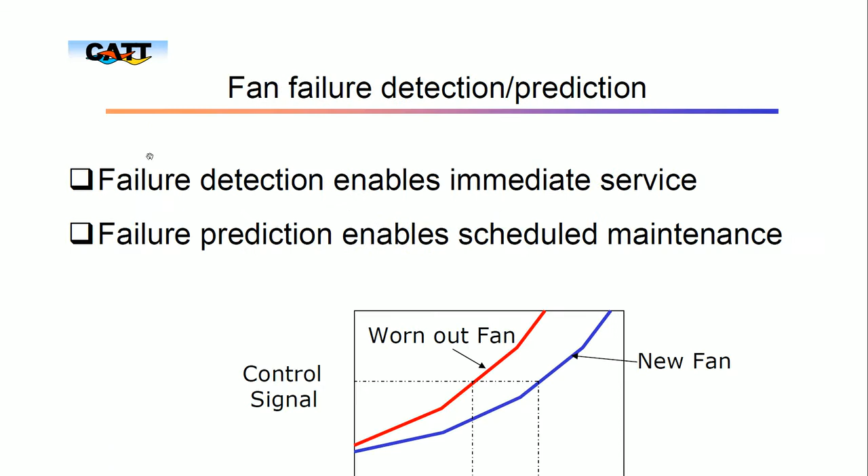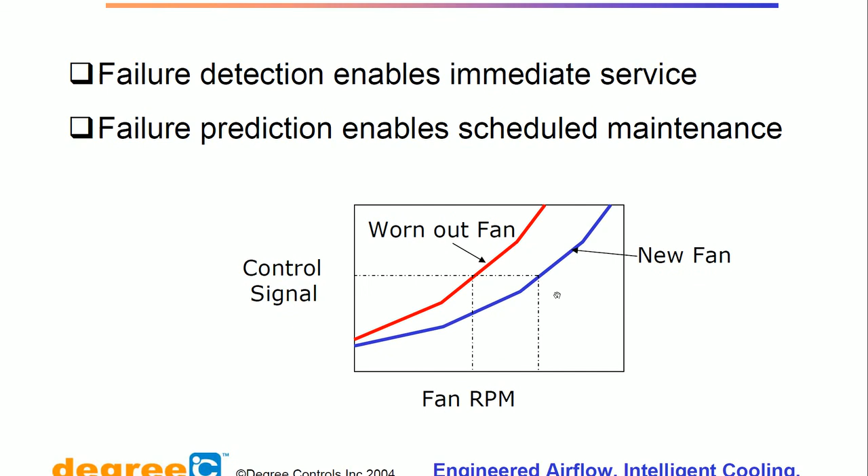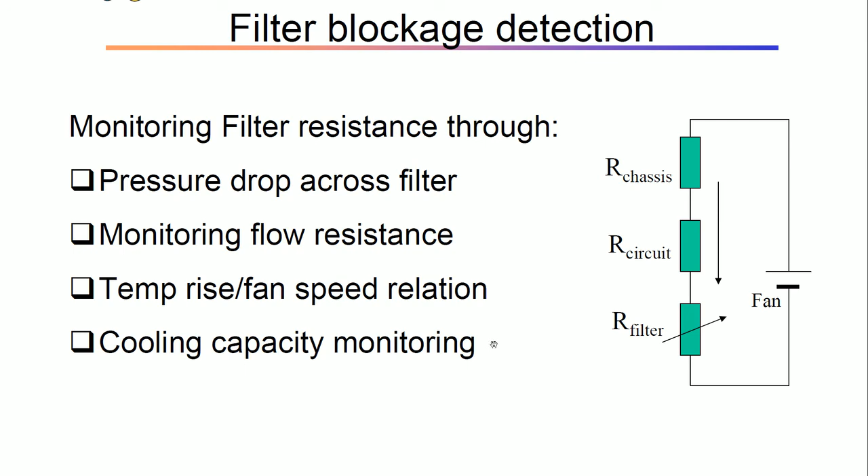Airflow rate, maximize reliability, immediate service, failure prediction, enable scheduled maintenance. This looks almost intuitive, and you need not worry about it, since we have so much monitoring of flow resistance, temperature rise, pressure drop across filter. These are all very much possible. Cooling capacity monitoring - all of them it is very much possible for you to detect.

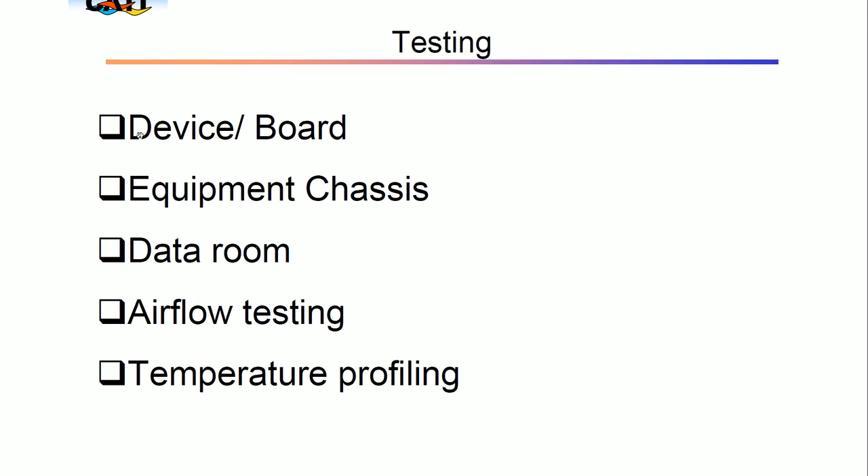So he has given their own, obviously a patent device which I have no comment on. So we try to do, when somebody needs to take data room device board equipment chassis and then work with all these things - operating flow, heat sinking parts.

This is something I would like to show. So we have here so many data acquisition systems, and that small one is a small turbine, so both types are there - a hot wire anemometer and axial anemometer where there is a rotor which is turning. I can't make out whether it is a hot wire anemometer or a normal, simpler turbine anemometer. Hot wire is a little sensitive both to external factors and extremely sensitive to temperature.

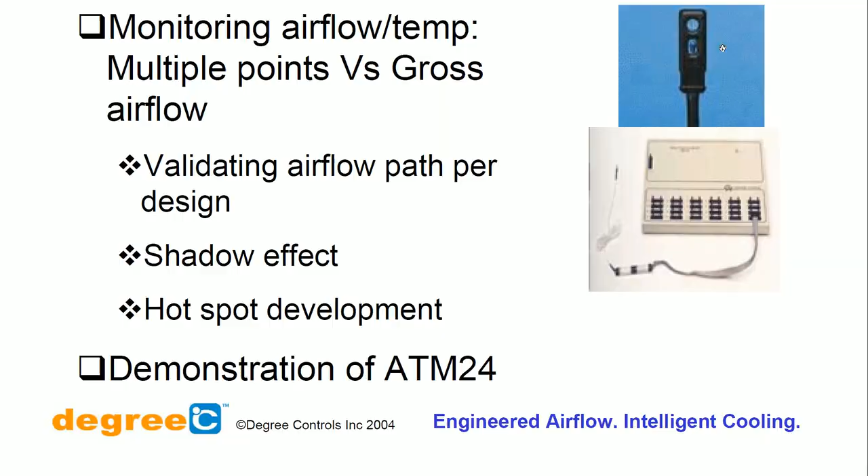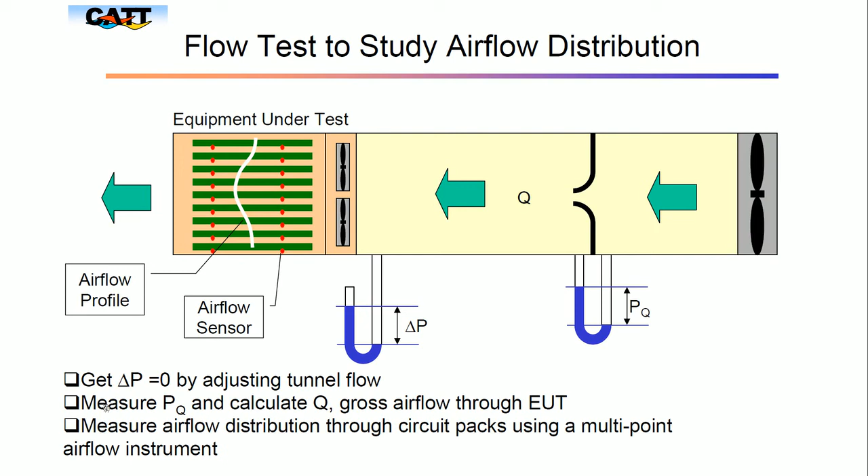And a regular turbine type anemometer has a beautiful thing. So we have some airflow sensors mounted all over the place, and then we try to measure and calculate airflow and so on. It is nothing - those same sensors have been mounted and somebody has tried to plot it.

So we have products, and we have heating and ventilation. In the case of military, I expect this is probably a camera which is mounted somewhere, and then we have medical devices, telecommunications, and I am not very clear what a critical facility is - that is a backup probably.

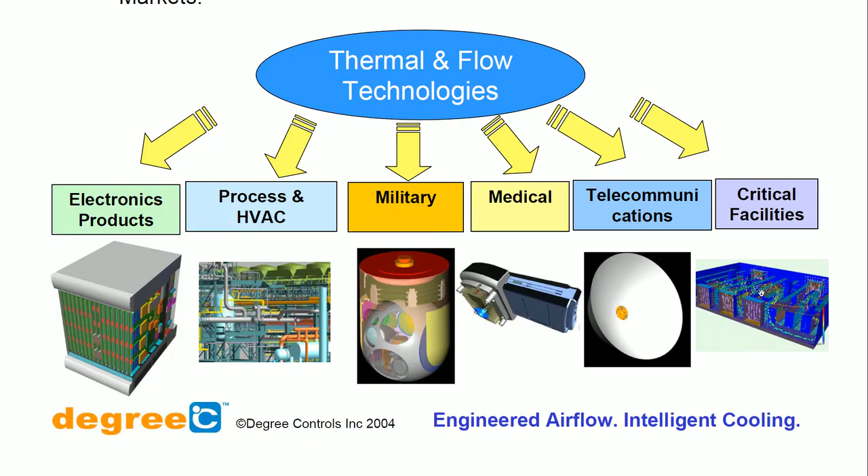This is again acknowledging directly from one of the companies which works on it. I am sure my suggestion is that you look for it on your own, and then maybe contact them and follow them to the extent of this thing, because for individual items they have it. Blindly copying one small part of it will only solve the problem so much. So thank you, we will meet again in the next lecture. Thank you.